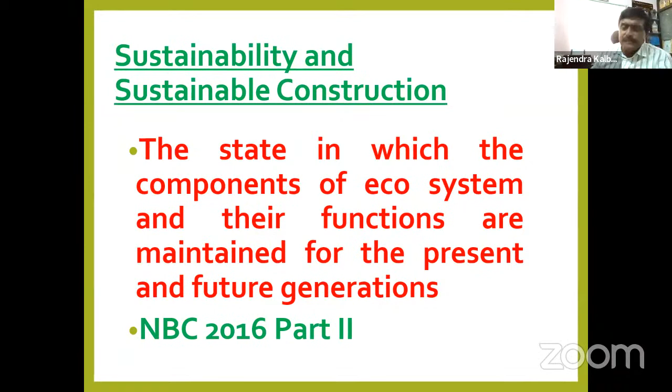Well, the theory is all right, let's see how practical it is. One man and water starts way back in the age-old Adam and Eve period, or in the Stone Age, where man had not seen his own face. The first time his relation with water started was when he saw his reflection, then he started drinking it, then he started living with it.

So it's all history - man used to go near the water, get water, and live near the water surface, the water area. And that is why we have civilizations named after rivers - it might be the Indus, it might be the Nile, it might be anything in the world. It is all named after the river just because people lived near the river belt.

Moreover, people used to carry water themselves and they knew the value of water. Of late, what happened - science started coming in. As science came in, people started living away from water. Cities started developing. People are not bothered whether we're living with water or away from it, because we have all the facilities now - we have the pipe system, we have the pump system. Even if you are hundreds of kilometers away, you can get water from a water source. You don't know where the water is coming from, but you have a water source in your house.

So, yes, you're going away from nature. You're going away from the ecosystem. You're going away from the basic system, what is called the environment.

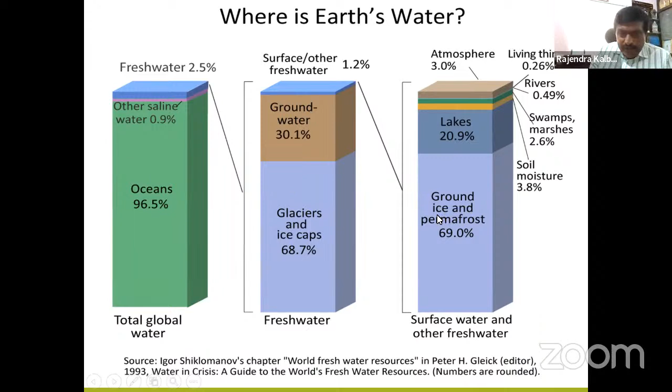But how we can? This is very interesting. On a daily basis, how much water do you need? If I had asked you this live, you would have answered.

Anybody who knows can put it in the chat. How much water does a person need for day-to-day life? I have given the percentage and the government target here. Exactly what number of liters per person per day is needed to satisfy day-to-day needs, including washing, drinking, everything. So 150 liters? It is 135 liters written there. Very nice, it is not 135. The government target is to supply 130 liters per day per person in urban areas, 100 liters in semi-urban areas, 80 liters per person per day in rural areas. Even with 80 liters people can survive. So is 80 liters the quantity of water required per person per day?

I'll tell you, it's very interesting, research has been done. They found that though the government gives 130 liters per person per day in urban areas, in cities like Bangalore, Mysuru, and everywhere they target to give, what people actually use is around 250 to 350 liters per person per day. We use that much water for car washing, ground washing, unnecessary gardening, house cleaning, which was not required. For car washing, you don't have to use a spray. There are better methods than using a pump to spray, which wastes a lot of water. Totally, people use around 250 to 350 liters per person per day.

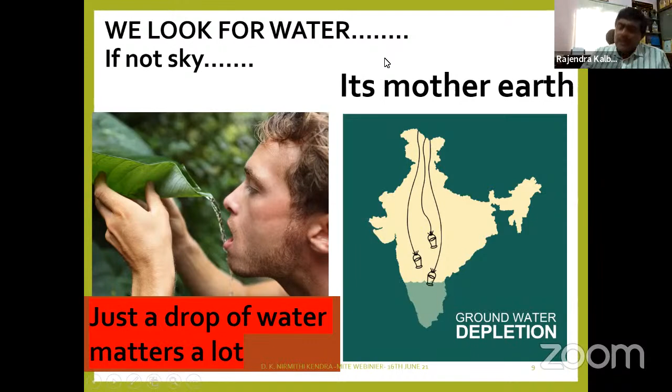Here is the answer, I'll tell you. History has taught us to be near the water, but science has taken that away - we have taken the water to our doorstep. We have enough pipelines, we have enough infrastructure. Even if it is deep in the ground, we can take the pipeline and bring the water out.

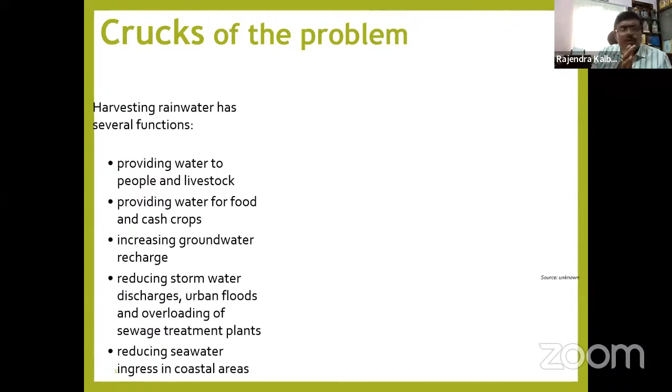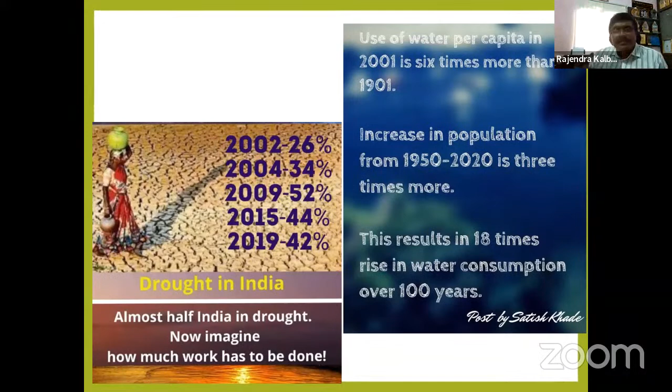So why are drought conditions increasing in the country? There's a study - in 2002 it was only 26%, in 2019 it is almost 50%. Even otherwise, almost 50% of India is facing drought conditions. Of course there is population increase from 1950 to 2020, that is also a reason. But is that the only reason? Are we not educating people properly even as the population increases, so they can live in this world happily? We need to ask questions of ourselves.

In earlier days we used to see water everywhere. There was enough water for everybody, and wells were a wonderful source of water. During the earlier kings' time, even the British period, it was only the open well and lakes as the source of water for human beings. Slowly, around 60 to 80 years back, we started drilling borewells. Once the borewell started and pipelines came home, we started seeing water only in the pipe. Then slowly, nowadays in cities, people see water only in plastic bottles - common in Bengaluru, Bombay, Chennai. I have seen people living only on plastic bottle water. I don't know what will happen. The same thing keeps happening - please read on, I don't have to tell you anything more.

So what is the solution? What's happening to water? Water has become invisible - it's becoming 'gayab', disappearing. I don't know where it will go. Now it's time to make it visible. So let's get into the real business of making the invisible visible.

What are the reasons for this invisibility? Depleted quality, scarcity, excessive use, depletion of groundwater level, drought, wastage, water pollution. These are human-made reasons - depleted quality is because of excessive usage, scarcity is because we are not saving it, excessive use because we are not taking care, groundwater has depleted because of borewell pumps, drought has come because we are not keeping Mother Earth soft and clean. We are wasting water, polluting water - it's all in our own hands. Yet we blame nature, we blame the public, we blame others, saying water is not there or its quality has gone bad. To make it visible again, there are solutions, though many of us are not following them.

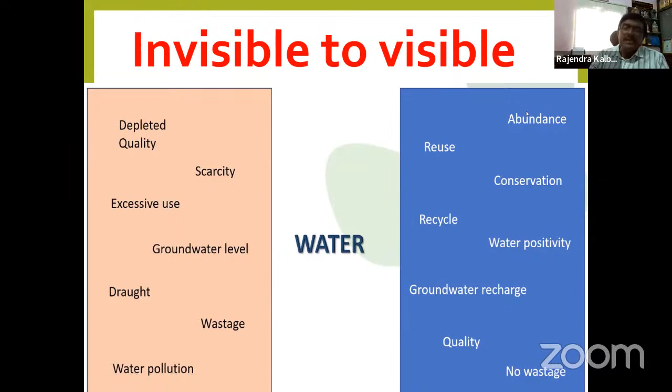Some are doing it, but now it has become a big business in India and all over the world. So friends, what is harvesting? Whenever we talk about water saving, people only think of water harvesting. Let me finish that subject. It is beyond water harvesting - there's a lot more beyond harvesting. But anyway, collection of water is harvesting.

When water falls on your roof, you collect it, filter it. Either you keep it in your sump tank, or charge your borewell or open well. If you don't have either, put it in a pit in the ground and allow the water to go into the groundwater table. Borewell recharge can be done directly or indirectly. For groundwater recharge, there are different methods - percolation pit is the best, including short, long, and deep percolation pits. Saving water bodies without polluting them is very important, as is watershed development - if you cut a tree for development, develop another watershed area so water is there in that area. Finally, it is the efficient and proper usage of water - when you have a lot of water, like when you have a lot of money, you spend it freely, right?

Yes, you do it, but you don't spend all the money. We have a lot of water now, but just because we can, does that mean we can spend everything? No, we need to take care of it. We need to do it in a very efficient manner. Water and money go together. Then only you can save water.

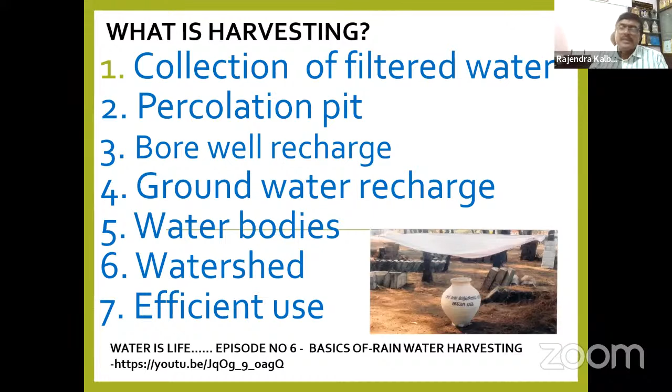If you go through episode number 6, basics of rainwater harvesting, in the Water is Life channel, you will get details on the different methods of rainwater harvesting. Who has to do it, what you have to do, where, when, with what - this is a common question. People ask, sir, how to do rainwater harvesting? I'll show you this video. It's very simple.

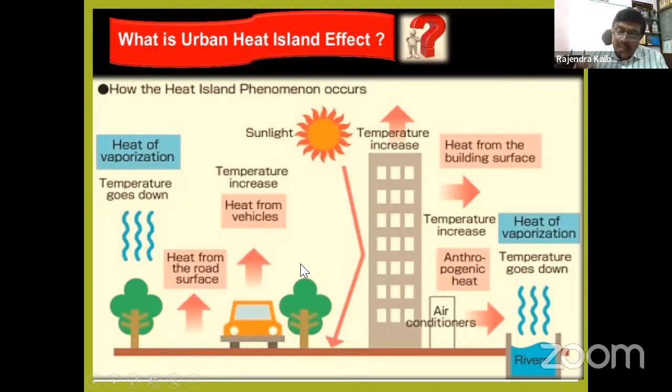You can make out very clearly that all our construction gives off heat - it might be heat from the surface of the road, from vehicles, from the floor, from temperature increases from buildings, and from air conditioners. It's only the trees and the rivers that give you cool air. So we need to sustain this along with the growing urban city environment.

Water scarcity in India - I don't have to highlight much on this because you've read everything in the newspapers. This is common nowadays. Every summer there's an article saying water is scarce, we are going to get into problems. Everybody has given a target of 5 years, by 2025, 2027. Many cities, especially Chennai and Bangalore, are going to dry up. If you don't take care, you're going to face problems. But still, Chennai is somehow managing now because they've done a lot of water harvesting and taken measures to increase the groundwater table, so that things will go on.

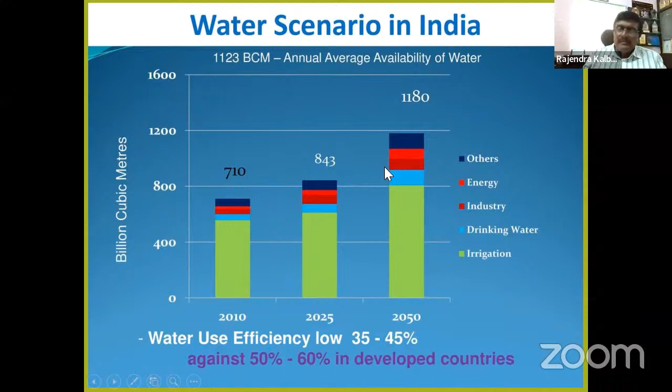How much water do we get and where does it go? We have houses of say 1,000 square meters, or 100 square meters. We are living in houses of minimum 100 square meters. So for 1 square meter with 1 mm of water, just 1 mm of water will give you 1 liter.

Suppose India's average rainfall is 1,200 millimeters. Forget about it, we'll take Bombay or Bangalore only, say 900 to 1,000 millimeters of average rainfall per year. So 1 square meter into 1,000 mm is equal to 1,000 liters. Very simple, 1 square meter will get you 1,000 liters.

If you are 10 square meters, then for 100 square meters you will get that. Because here we call it all square feet in Mangalore, so it is only a 1,000 square feet house or 2,000 square feet house. Like in Bangalore, they call it 10 square house, 100 square house, so that's why I'm getting confused.

Don't worry. So a 1,000 square feet house, or 100 square meters, at 1,000 millimeters will give you 1 lakh liters. If you can collect 1 lakh liters, there's nothing like that. Forget about the cost of the tank, I'm not talking about that, but you get that much amount of water free of cost - that is what is important. In 1 acre, we have 10 lakh liters.

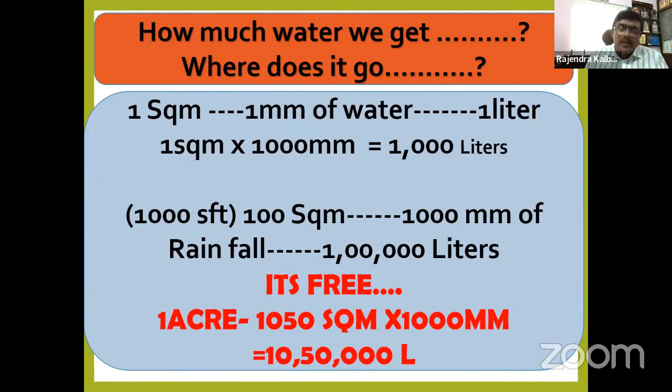Well, it's interesting. Now okay, we get that much water, but how are we using it, how can we get benefit for our purpose. Suppose there are 4 members in a house, we just calculate in a simple way. 4 members need, say, 100 liters per day - I said 80, but 100 liters per day. If you calculate over 365 days, you need 1,46,000 liters.

And still, I feel we are much near the average annual requirement of hygienic needs for a human being as per World Health Organization. What is the minimum quantity of water needed for a man to satisfy basic needs? Here it is: at a higher quantity, about 20 liters per capita per day should be assured to take care of the basic hygiene needs and basic food hygiene.

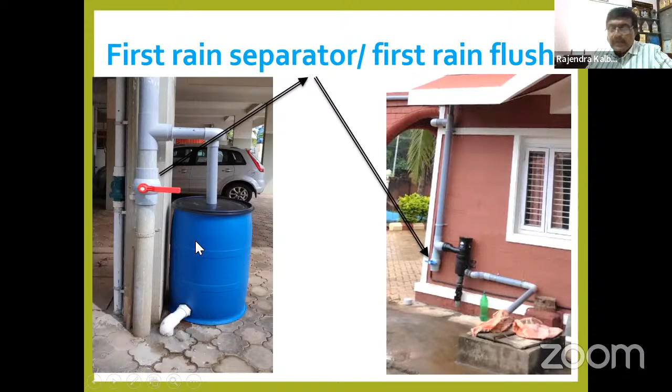So you should never forget a first rain separator. This is how it works when it's heavy raining in a multi-story building, we did it for the multi-story building. See the amount of water - that's only a first rain separator. Whatever collected in that will go and it all separates out.

Now the heavy rain is happening, you can see the water in the drain. When the heavy rain happens, we just opened it. So see whether any dust particles collected in the first rain separator. If there's no dust particles, then absolutely no problem, you can allow the water to go into your bore well or the sump tank.

See here, this first rain separator is with a knob, very clearly. You close it, it will go through the filter, then from the filter, it goes into the well. Very, very simple.

I've got a video, number 7, which explains very clearly about the first rain separator.

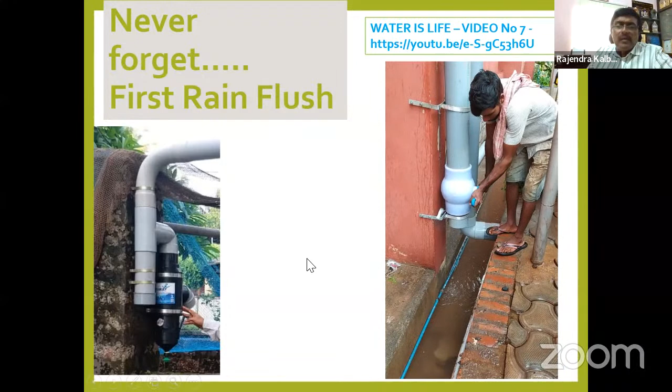Okay, now what are the types of filters? There are different types of filters, my dear friends, all available in the market. But the only problem I have seen with the public is that they just collect the filter, install it - the plumber will do the installation and he will go. Finally, people don't know how to maintain the filter.

There is everything like our human body - there is a small piece of maintenance every filter has. Some filters you don't have to maintain immediately, but at least once a year you need to maintain them. Some filters need to be maintained regularly, keep an eye on that, see that the sludge is not collected too much so it doesn't block the way of the water, and so on and so forth. There are simple filters like pop-up filters made by KSCST. It is very simple, but you need to maintain it, clean it once a year.

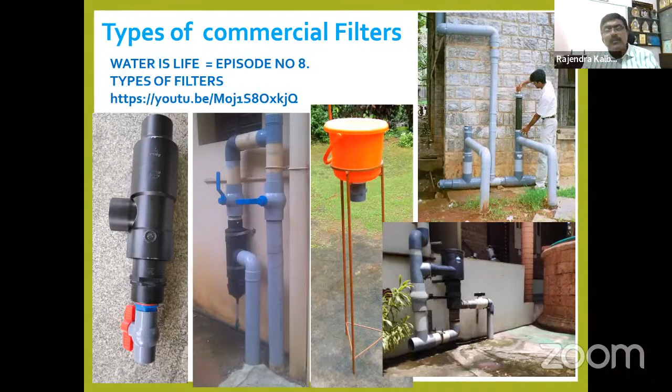And at the base, you can see this is my house. This is episode number 8. We'll tell you what are the types of filters and what the filters do, how you can prepare your own filter. This filter you can prepare yourself, it's very easy.

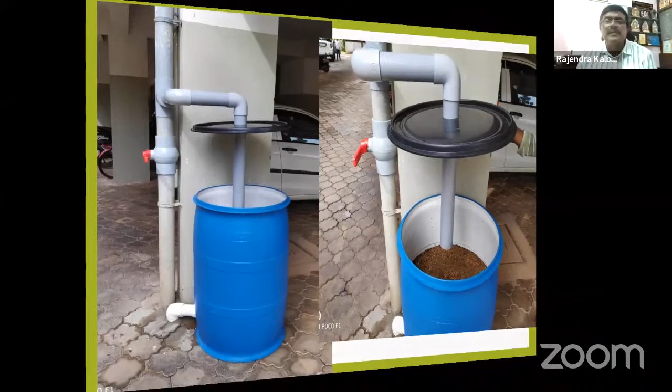With different varieties of boulders, you put it, and finally Netlon mesh, then coal, then Netlon mesh, and leave a small space open for the headroom for the water to collect there. And you got pure water, you can let it into your borewell.

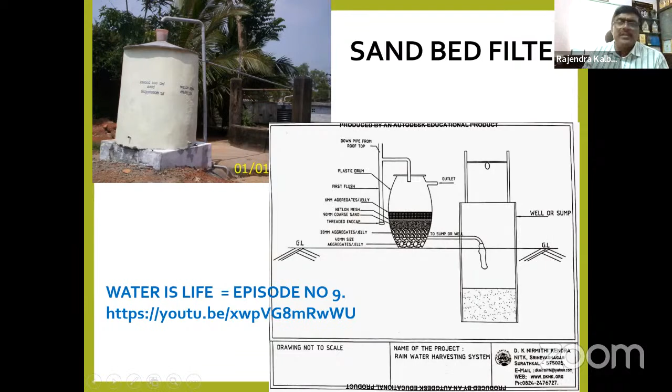Episode number 9, I said you can get a very clear idea on how to make a drum filter by yourself. You can make it yourself, nothing complicated. This is very simple. This is my house, my dear friend.

I have done rainwater harvesting for the past almost 22 years now, from 2000 I have been doing it - 2001 and 2002, almost 20 years down the line. And absolutely no problem - I am drinking well water without boiling, without filtering. Well, let's get into other aspects.

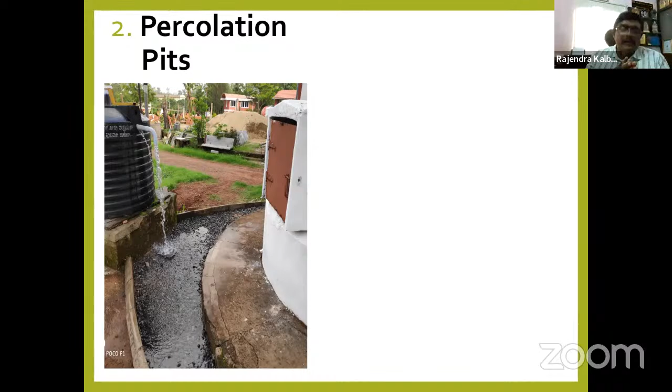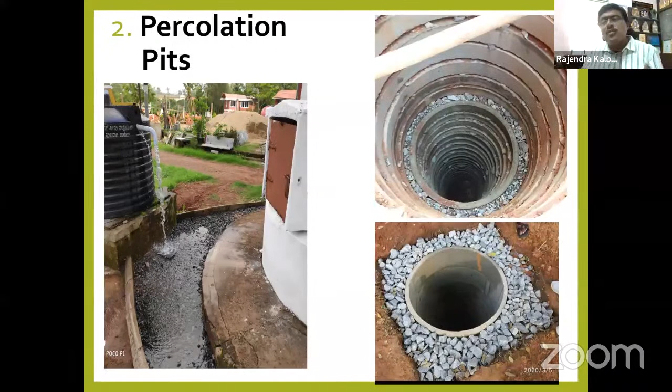And if water is too much, then you make a deeper hole. When you have the capacity to make a bore well of 300, 600, 1,000 feet below, make a percolation pit of 30 feet - who stops you? And you can allow the water to go in. Here's a simple method which you can do during construction. This is a small building, but see.

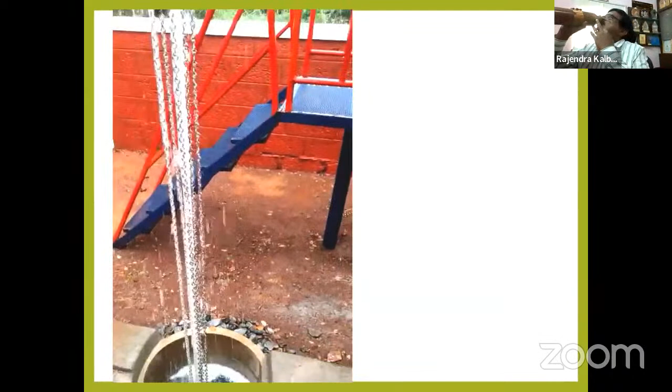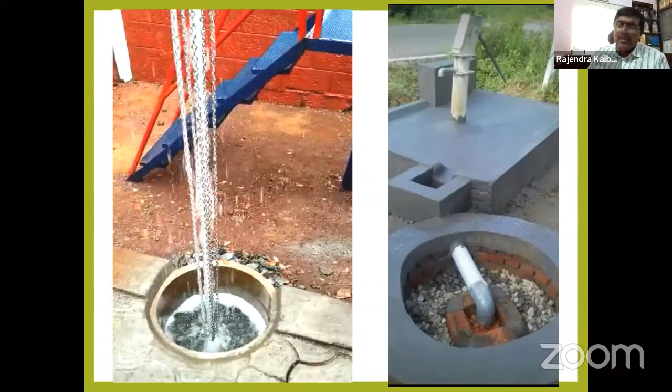See that percolation pit, it absorbs water, it never overflows. This is what we can do at a construction site also. Our laborers wash their hands, our laborers take a bath, and we allow the water to go and it will spoil the surface of our construction site, and a lot of mosquitoes will come around. Instead of that, just allow it to go into the percolation pit. If you are in a house, you can do a similar type of percolation pit, absolutely no problem, and later cover it.

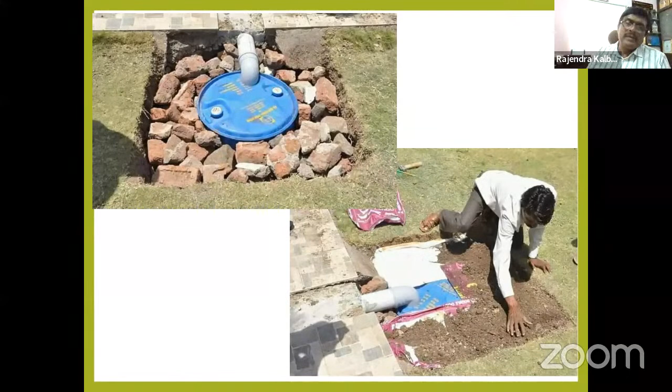You can use the surface, it might be a lawn, whatever it is. This is my house again, and we have done a percolation pit at the exit - this is the main gate. Next, I've made a diversion, I've made a percolation pit. See, this is not a ring, and I kept a hole there, and I covered the top. I'm using the top surface.

And this is the cushion area where I've filled it with all the waste, jelly, gilly, and stones and all.

You're not losing your garden space. You can cover this drain also, so that the entire space is available for you. Water goes through the drain, enters into the pit, stays there, and gets absorbed into the ground. Very simple, and this is at the back side.

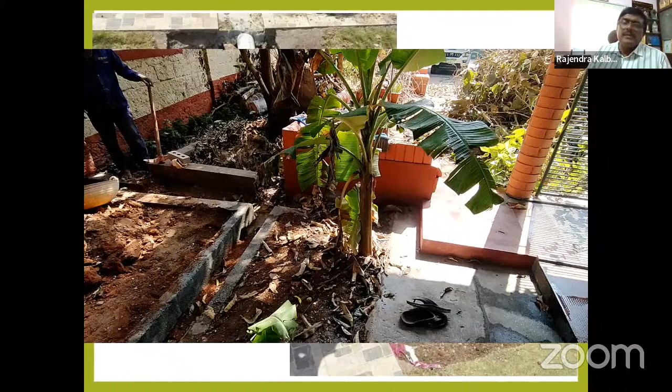This is done during construction only. It need not be always round, it can be square also, it can be rectangle also. An old leach pit was available. I made it a little bit shorter, created a buffer zone, and did a percolation pit. Very important, at the base you need to put boulders like this so that silt does not form and block water entering into the ground. So simple, it can take lakhs and lakhs of water.

Okay, I will go further. And if you have a very big building...

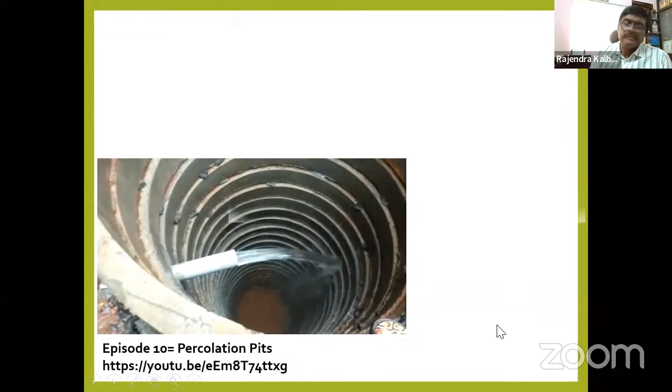This is another percolation pit which we have covered. See what we have done at the site, you can see the water getting into the percolation pit. With a huge building, that building can give you an annual 50 lakh liters of water. It is a huge quantity of water. I have made it go into two percolation pits. This is one at the bottom, this is the second percolation pit. Just have a look at it.

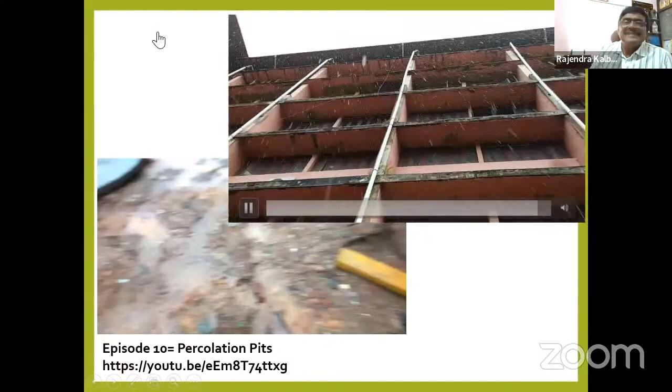These types of percolation pits can take a lot of water, especially at a construction site. Can't we do that? And yet we struggle for water. Why should we struggle for water?

And this is a wonderful machine, the borewell. This is interesting. See the quantity of water coming out. And with that much quantity of water, we take it from the ground and we are never bothered to give water back into the ground.

And there we go wrong. See, if you look at the earth structure, earth behaves like a sponge. We thought there is a huge lake below the ground where we can take more, sufficient quantity of water to meet all our greed. No, it doesn't work like that. It's just like a sponge, and you are digging a hole in the sponge and squeezing the water out.

In a given rainy season, water can enter up to a depth of say 60 to 100 feet only. Beyond that it cannot go down. Then it takes its own sweet time to go deep into the borewell, it takes years and years together. And we insert a pump and take it all out within say 10-15 minutes.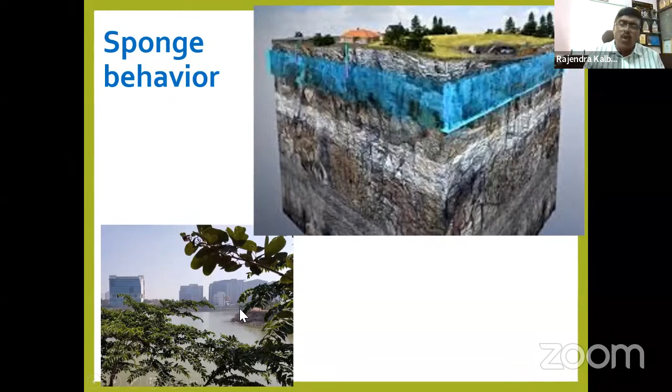So the water which falls on the ground can go up to say 50 to 100 feet in a given rainy season in one year, and then you can extract it, take it out in a year. Once the water table goes down, rain has to come again, then you refill it, you do water harvesting, and you can use it again. That's a wonderful cycle. Depending on the condition of the ground surface, water stays, and that is why lakes are formed.

Now, the effect of a borewell is very, very bad. People say it's easy to think about a borewell, but if all were open wells, everybody would get water. In a given layout, if one man does a borewell with a high pressure pump, a cone of depression will start, and even the open well will go dry. That is why heavy pumping is very, very dangerous for groundwater.

How do we recharge a borewell? It's very simple. See, this is the borewell which has been dug. Tighten the base, then you drill. Small drills are to be done, and drill many holes have to be made.

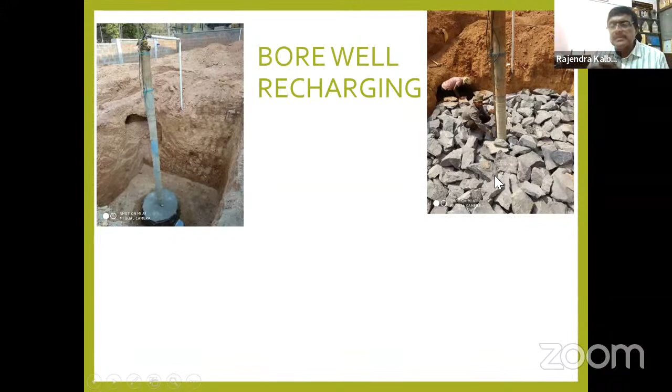Cover it with netlon mesh. Then bigger size stones, then smaller size stones, then a netlon mesh, then coal-like material, around 4 to 6 inches thick, you have to put. Then again a layer of netlon mesh, then cover it, and make a stand platform and allow the water to go into the borewell.

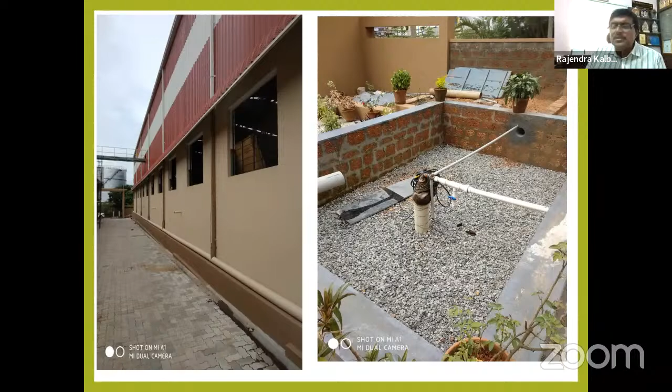You will be surprised to see the amount of water getting into the borewell, deep into the ground, into the deep aquifer. It's so superb, it's awesome. See the quantity of water getting in. It slowly drips into the ground, absolutely directly deep into the mother's stomach.

Absolutely no problem. If you start feeding your groundwater, then you have the right to take water also. You don't feed, you only want to take - that's not right. Like in a bank account, if you only put money in, you can take it out. Without putting money into the bank, you cannot take money out. So you need to recharge. That's the basic thing - recharge your mobile, recharge your bank account, and why not recharge your ground?

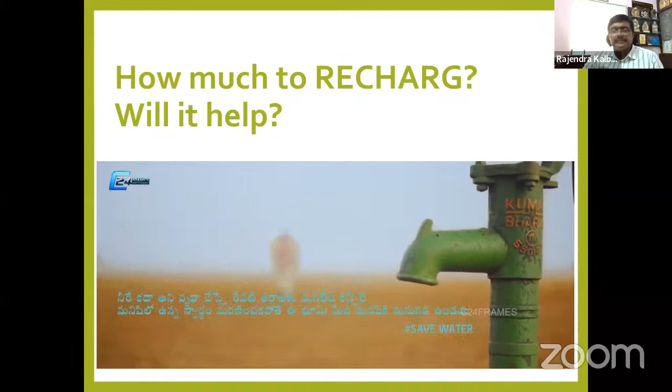So it's very simple. It says humanity cannot survive if greed does not die. The water has to be shared among everybody. We cannot be very greedy. We engineers have to think 100 times about it, especially in our construction.

Coming to the point, yesterday we had a lot of discussions on the IGBC ratings and Indian Green Building Council. I don't know whether you had a discussion on these points, what IGBC was telling. Have you noted that the water conservation points and energy efficient points - they have other points also, they have a big list. Out of that, what rate gets the highest ratings, the highest points? Have you ever observed? If you had observed, you would have realized something.

It would have been really nice - if you had observed, there's one more interesting thing. Thank you for your feedback, my dear friends. See, the IGBC ratings clearly tell you that water conservation stands the highest among all the IGBC rating points.

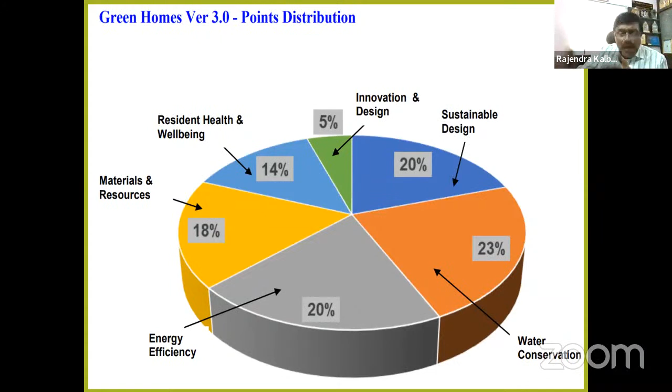Total water usage in construction is something like that. Water used per unit area of construction largely remains undocumented. It's not that it's undocumented - we are just not bothered. Any engineering company, any engineering college, any university, if they build a building, nobody is measuring the quantity of water being used for the construction of that building. So that is the state of affairs here, but there are some studies, very nominal studies, that have been done.

They say we need around 27,000 liters per square meter of building construction. The whole building is around 1 lakh square meters. Imagine the quantity of water required.

So actual construction, as per calculation, if you can make as per your adequacy requirement, as per your calculations we have, we know we calculate adequacy - what is the cement, steel required for the building, and the same way we can calculate what is the water quantity required.

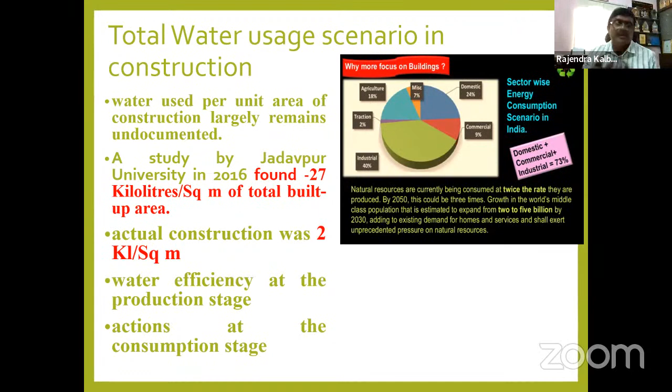We need to have water efficiency. It has to be in the production stage, construction stage, as well as usage stage - the total cycle of the building. You need to calculate the water usage for it to become important. Actions at the production stage, consumption stage, and usage stage - all their efficiency has to be there. But they say 20 kiloliters, that is 20,000 liters, is required for a building. That is what they say.

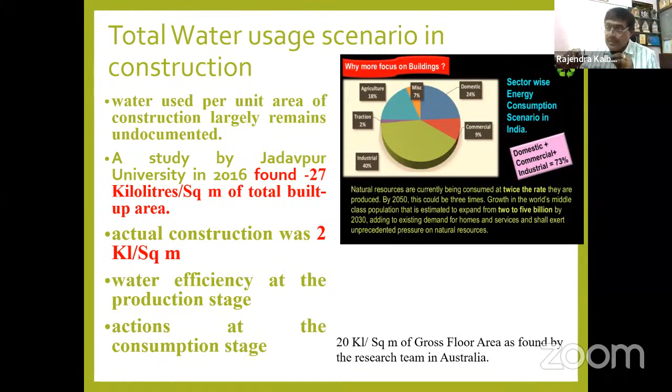Practically, this happens. Designing as a whole unit, concerned as a stakeholder, what we need to do - our design has to be 360-degree beautiful, 360-degree correct. And we should not harm the eco-sensitive sites.

Suppose we have a building that has to be built on a hillock. Just because we are doing a building, you break up the hillock, level it, and then do a building - then probably the earth behind the hillock, what you have leveled, might fall off or cave in any time. So you need to build a big retaining wall. You spend a lot, and finally even that retaining wall might slide down one day.

We don't know, so you need to be very careful. Lakes, forests, canals, etc. have to be taken care of. Wildlife corridors, wetlands, floodlands have to be avoided. IGBC guidelines have to be taken care of. Then you will be designing your buildings in line with the ecosystem.

So whenever you build a plant, when the construction is going on, if possible, you grow the greenery also together. And you make the proper total provision for the greenery also.

Any plant utilizes 2% of the water you're putting into it - only 2% of water is utilized for making food. Or if it is giving a fruit, it is only 2% of the water used for making the mangoes, what you eat.

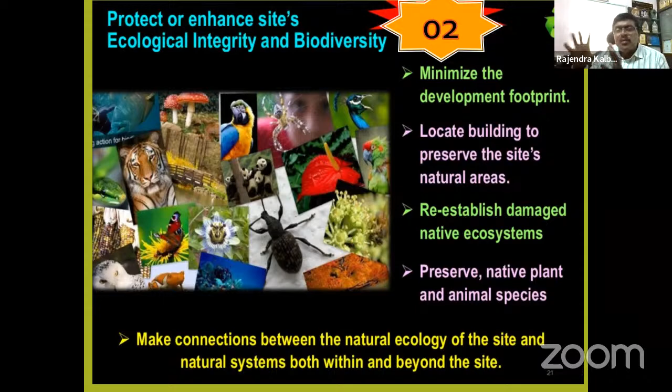Look at the building, preserve the site, natural areas - we cannot go on doing it. So sensitive construction as well as sensitive usage of water, everything comes together. And if you don't do that, this is the problem - earth will act according to its will and wish.

So let's be very careful when we do our buildings in future. Coming to civil engineering now, designing the material - what are the types of material we use? What type of material gives less water usage? What are these sustainable constructions? Let's see.

When you design a building, if water has to be used less in construction, then it should contain a lot of open space, fewer walls, and the wall length has to be little, with free movement of space. People are comfortable - once going into the room or house, they should not feel very hot.

And they should not feel uncomfortable so that they drink more water, use more water - no use. When they drink more water, no use, man will only go to the washrooms regularly, nothing else. So let not that happen.

Your designing has to be very space efficient, and you should use only locally available materials, because the temperature and environment conditions vary depending on the place. For example, in Mangalore it's a very hot and humid place, and if you bring material all the way from Rajasthan and put it,

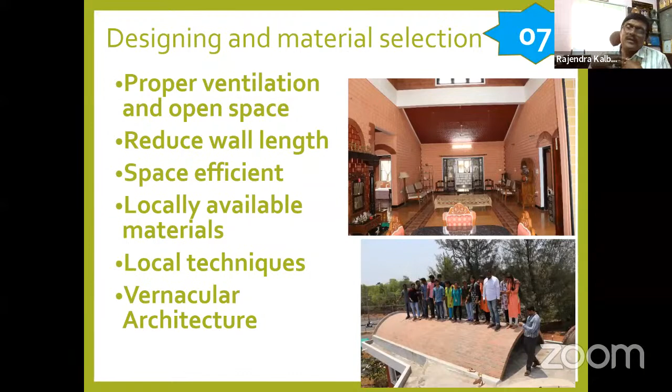This is a mud block building. You can see arches there, and exposed masonry. You can see filler slab, where you have less quantity of steel and cement, so it will not give you more heat, and you feel comfortable inside using less quantity. So the circle is complete.

What are the different eco-friendly construction techniques? Apart from using locally available materials, you need to avoid too much steel and cement, which will give you more heat. Now, what are the techniques? If we start from the ground, we have arch foundation.

Of course, you're all from civil engineering, all from the Nirmithi concept, so we have come across this arch foundation. Instead of using lintels, too much lintel means too much steel and cement. Avoid lintels and beams, use arches. In earlier days, they built bridges using arches. When they carry so much load, can't our arches carry a simple slab load? It can. We just need to do it properly.

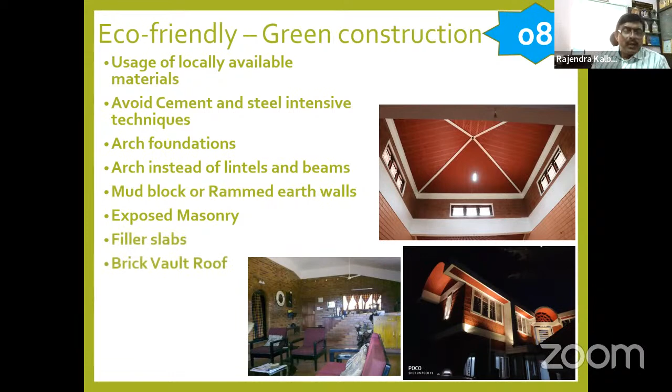Mud block, rammed earth walls are one of the best options. They give very comfortable interiors, less cement and water, and exposed masonry, filler slab, brick vault - these are all familiar to you, I don't have to explain.

People always say that when we do a normal construction in stones and similar materials, at least 1 square meter of wall construction needs an average of 350 liters of water for 1 square meter.

What if we don't use water at all? If this is adhesive, then you don't have to use water. This becomes zero - it will become very, very water efficient. Absolutely no problem. And people say there's a lot of wastage.

Now machines are available which will provide a paste of chemical only on the edges, only on the surface available, whether it's hollow or not. So you have a lot of efficiency there. You'll save a lot of materials with these types of clay blocks.

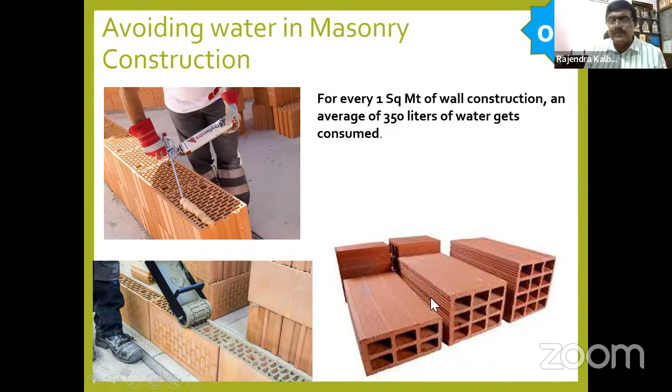We can construct almost with very, very minimum cement joints. There are concrete blocks which again consume less, and we have what is called interlocking blocks, which again hardly consume any cement mortar - absolutely no mortar required.

And I have constructed this - this is my own construction. I don't preach what I don't know. See, these type of mud blocks we have used, and this is not cement mortar, it is cement slurry. You can see there is absolutely no mortar anywhere - it is just blocks laid one above the other, interlocking mud blocks.

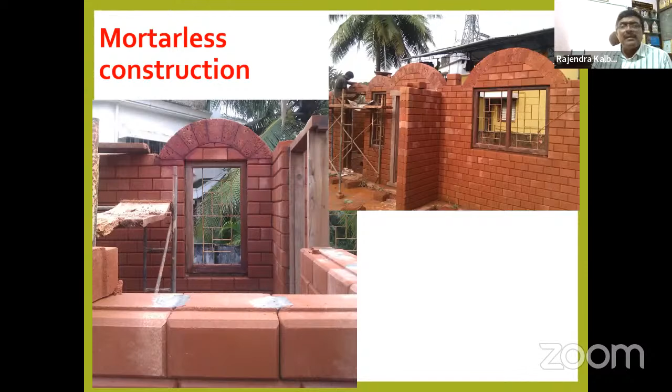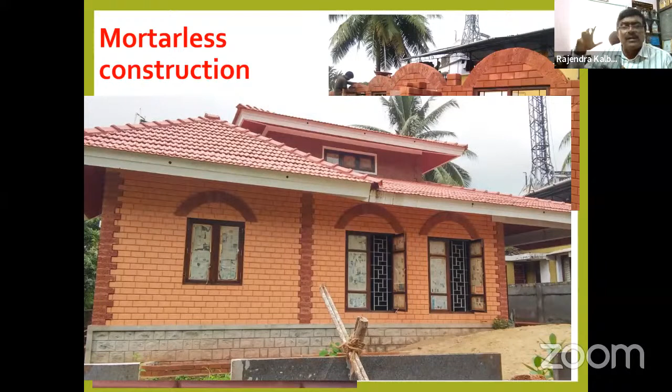And the house can be completed very nicely. It looks very beautiful - see this. The people are very happy with that. This is mortarless construction, absolutely no mortar. We only use cement concrete for the slabs, roofs, and a little bit of arches.

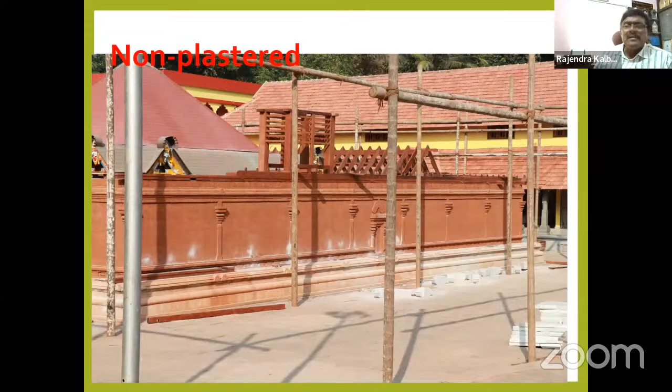With all these techniques, absolutely no plastering. This might be a temple or a house - no plastering at all. It gives you dual advantage: one, saving cement; other, saving heat, less heat and more comfort, and less usage of water.

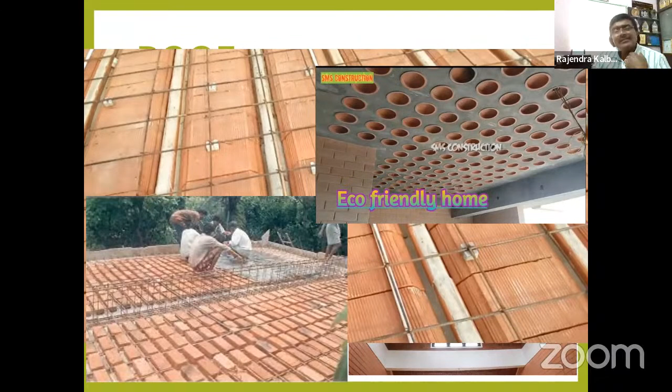Even the department hasn't bothered to plaster it because they're happy with the exterior. Nirmithi engineers use filler slab with less cement and steel, so usage of water also comes down and the interiors look good. This is the filler slab with clay or Mangalore tiles, hollow clay blocks, bricks, pots, bottles, and coconut shells. We can construct filler slabs with different materials.

Absolutely no problem, but this is one concept we are only promoting - that is zero maintenance building. No plaster, no paint, no maintenance, and we are very happy in the long run. Sustainable water usage will come in the long run - absolutely no water required.

These are all old buildings. This one is around 30 years old now, this one is around 20 years old. Even today it looks the same - absolutely no painting required. It is called the natural beauty of the building being maintained.

Now coming to the buildings, how we can save water in the finishing. There are a lot of fittings available, especially in IGBC, water saving fittings that carry special marks and points. You have to use waterless urinals, it's very good. Otherwise, very water efficient closets are available with a maximum of 6 liters, instead of 12 to 18 liters used in the olden days. Now you can get a water closet with a maximum of 6 liters per flush.

You can use a mini flush option too, where hardly 1 or 2 liters go. Then there's a dual pipeline for flushing - this is a different concept. In Nirmithi it's not possible, but in public buildings it's possible.

When you have an STP or a leach pit sort of thing, a septic tank, the water that comes out is clear water, and this clear water is allowed to go into a separate tank that is used for flushing. This is possible. Then there's the push button, dual button flush knob, and all these things are available. There are many efficient fittings available nowadays.

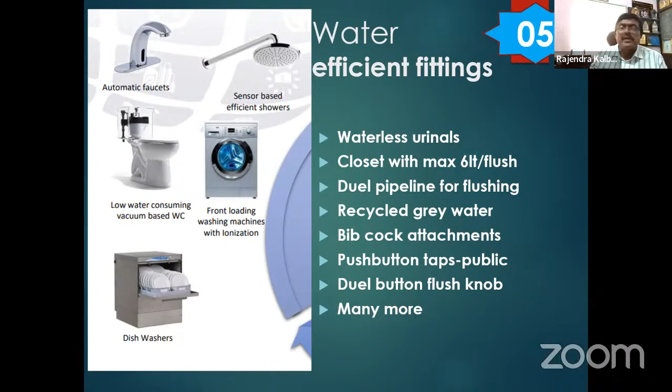There's something called aerators, I'll show you that - this is very efficient. Earlier we used to get water fittings like this. All your houses, offices, public places should put these aerators. If not, these fittings are available. Please use this so you can save water and live comfortably.

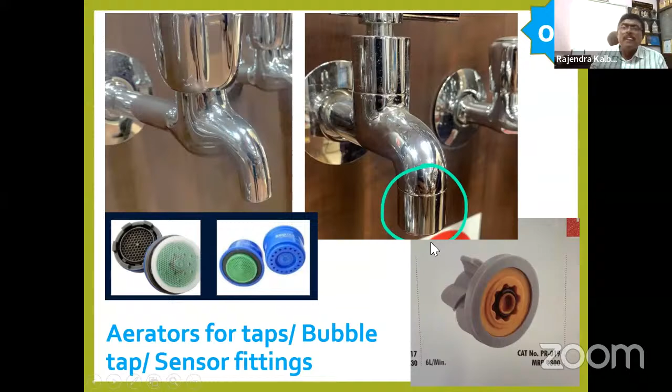This is one more technique we are using - this is again in my office. We have used a biodigester, the first to use this in the district, which gives you very clear water with 100% recycling. Your toilet water is completely recycled and you get clear water used for gardening. It's a very eco-friendly solution - no power required, power consumption is zero, lifetime zero maintenance, and less space required.

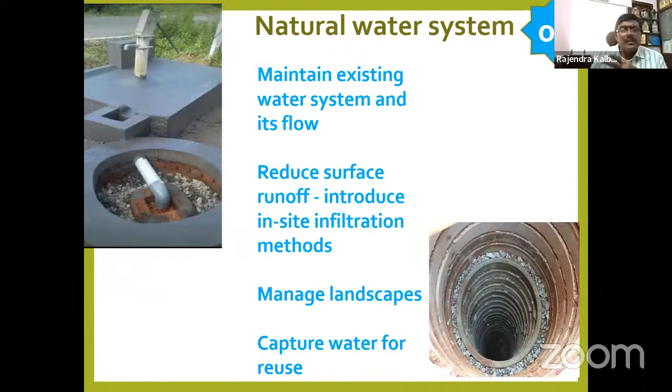And it gives clear water output, which can help greenery develop very easily. The existing septic tank can be converted and the water is 100% recycled. So at construction sites, the best thing is to do a percolation pit, maintain the existing water system flow and runoff, and do a big percolation pit so water is not wasted. Don't allow water from your site to go outside, so whatever water you draw from your borewell is used for your own purpose.

So we have one more fitting available, again in our office - we have something called water from nowhere. That is, we get water from air, an air to water machine. This machine converts humidity into water, so no plumbing is required - just plug in, collect water, and drink it. Very efficient and very helpful.

Then there are bottle filters available now in the market. AquaGuard is one. Then Neeru filters is another, available for Bangalore - it's not available here, I'm looking forward to that. If all the laborers in the construction sites can use this, they can straight away take the tap water, fill it, and drink it.

And it filters and gives you a healthy body. Your body will remain healthy, and they can work for a better digestive system. Everything will work happily, absolutely no problem.

So all you need to become sustainable in construction is to become water smart. Apart from using water efficiently, you need to become water smart in every aspect of your life.

So I was talking about water metering. This is a classic example of a village in Maharashtra, where they practice water budgeting every year. They calculate the water requirement for every farm and the average rainfall in a year, and maintain something called a Paani ka passbook. Once they develop that passbook, according to their calculation, if they have a borewell or a lake, they pump water to each field according to what crop he wants to grow. That's an amazing technique, and it has been well appreciated all over the country.

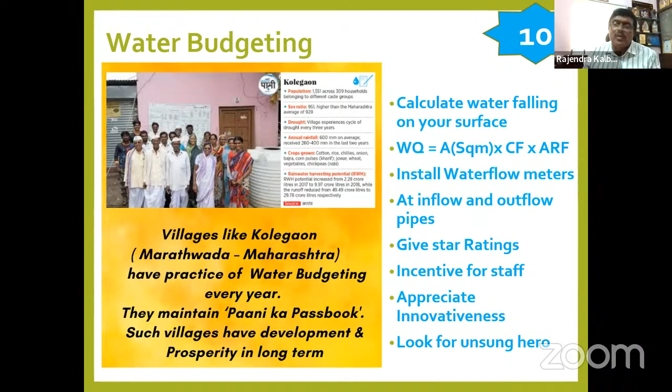Then you correlate it: number of people, number of houses, total say 1,000 liters here, 20,000 liters there, divided by the total number of people in the house. Per day, you will come to know how much water you use. This is called water budgeting.

So water is like hard cash. As I told you, unless you recharge it, whether it's an open well, a lake, or a borewell, it is like hard cash you cannot withdraw — an ATM card will never work. So it is like an SB account. Surface water is like cash, the SB account is like an ATM card, and the borewell is like an FD account.

So you should use your borewell only when your SB account gets dried up. You don't have money to put into the SB account, it's empty, then you remove the FD, otherwise you don't. Nowadays, people are not bothered whether it's SB or FD because the bank has a sweep system — your FD automatically gets into the SB, and finally you don't know how much you're withdrawing. You think your FD is still there, but it's drying up very fast. That's very dangerous, and that's what's happening. We are not bothered about our SB account, we are just taking water from our FD account. So let's be careful.

So if we really work hard and bring conservation into the system — take up lake construction, lake rejuvenation works — we need to be very careful about how we save the environment through lake rejuvenation. Once we do it, even a 20-year dried up Devanahalli lake can come back to life. Even a 10-year-old dried up open well can come back to life just because we've taken up rainwater harvesting methods, recharging the groundwater. Water can be everywhere very soon.

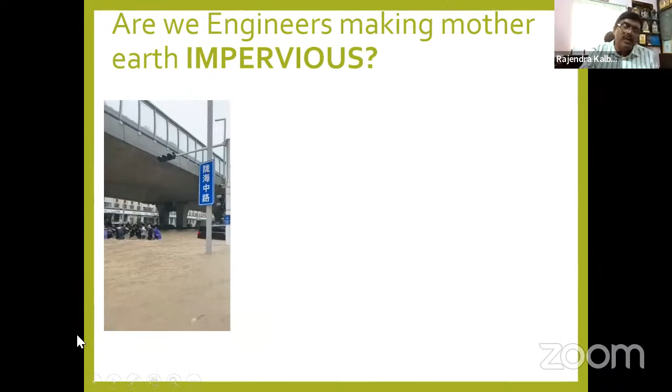But now what have we done? We have built roads, water does not enter. Our yards are covered with interlocks, water does not enter. So water has no place to go into the ground. Instead, now we are allowing water onto the road. And when you allow water onto the road, this is what happens.

There will be loss of human life. There is a lot of water flooding. This is called urban flooding. Nowadays it is common in Bengaluru, common in Bombay, common in Delhi also.

Can't we reduce this? Can we engineers contribute ourselves by providing percolation pits in our own ground? Prime Minister has given a call called Catch the Rain when it falls, where it falls. It's a wonderful campaign our Pradhan Mantri Modi ji has taken forward. This is the second year which is running. The first year, the Catch the Rain campaign went on very well, and a lot of MGNREGA programs also took place in the rural side. A lot of people worked only on water conservation, clearing the weeds, clearing the ground, and doing water harvesting. Lake rejuvenation has happened. Borewells and lakes have been cleared up. Open wells were cleaned up. So what can we engineers do now?

This is my previous episode of Catch the Rain. From the Catch the Rain campaign itself, I have done 3 videos. The third video will help you reduce runoff water. Just go through this. I have 19 videos in total. I cannot show you everything here, so I'm showing you one video. Just go through it.

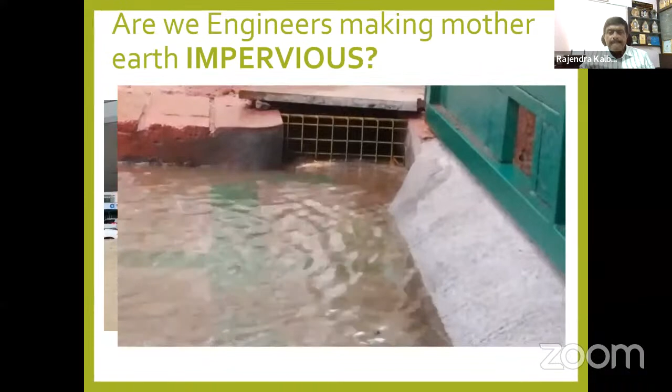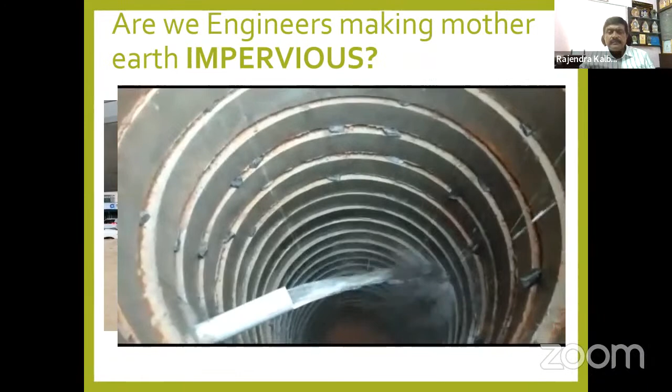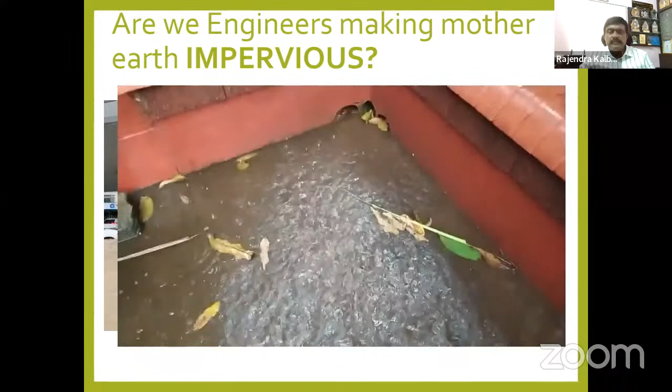Rainwater falling on every compound flows out into the streets. There might be more than one outlet for water to flow out of the compound. Construct a recharge well or a percolation pit near each outlet. Divert the outward flowing water into these recharge wells. Water collected in these pits will slowly seep into the ground, thus recharging the groundwater table. Construction of a recharge pit or percolation tank is explained in detail in episode number 9 of this channel. The depth and size of the percolation tank can be varied depending on the quantity of water and the nature of the soil. Water from only paved surfaces, concrete roads and yards should be let into these pits. Do not let water from natural muddy ground into these percolation tanks, as it leads to collection of silt and soil causing blockage. In muddy grounds, farms, estates and hilly areas, percolation pits can be simple and shallow in depth. They can be square or rectangular in shape depending on the soil condition.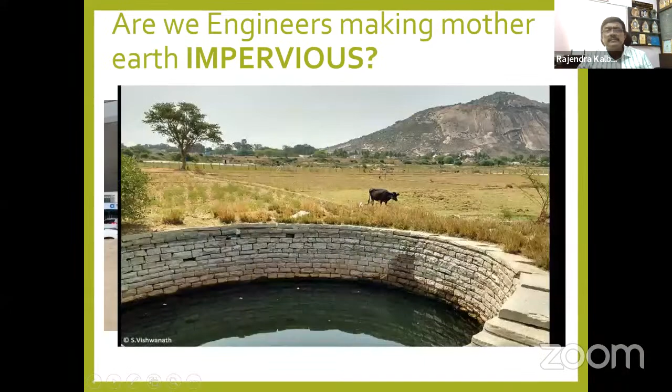Every compound should stop rainwater flowing out into the streets. Then urban flooding can be controlled to a large extent. Let us make up our mind and follow these systems as explained in this series, Catch the Rain Part 1, 2 and 3. Once done, it is a lifetime investment to recharge the groundwater table and contribute to nature's well-being. Let us join hands and give back to nature what it wants. That's all in this episode, Catch the Rain Part 3. Press the subscribe button, post your comments and share this video with your family and friends. Namaskar.

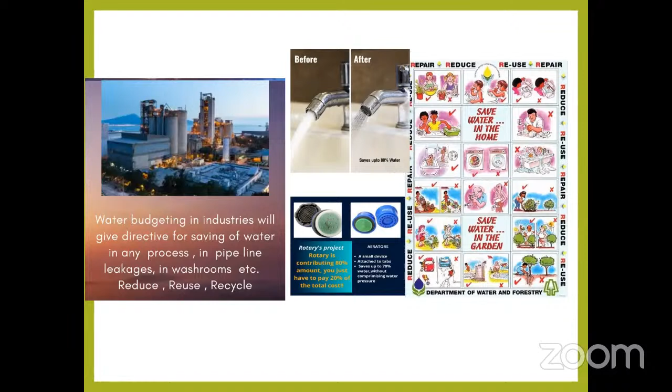So friends, that is how we can also contribute by not allowing runoff water into the cities. A large extent of water can be controlled, not 100%, but to a large extent, if every house site or multi-story building does a percolation pit. Of course, we have our own restrictions. Just because I'm telling you percolation pit, you cannot do a percolation pit in every place. I have done the next video, which is do's and don'ts, explaining where the percolation pit has to be done and where it has not to be done. Those things are also told there, you can go through that. I cannot tell everything here, I can only give a small bit of information.

Well, coming to industry, out of the total quantity of water consumption, irrigation, construction, domestic, and industry all put together take the balance portion of it. So industries also play a very large role in conserving and preserving water, reducing and recycling water. But you know what, the best part is industry is growing because of water. These aerator manufacturing companies, that aerator industry, is doing very well now. The water efficient fittings have been manufactured by many companies and they are doing very well. Water recycling and reusing companies are doing very well. The STP, sewage treatment plant companies, are also doing very well. There's a lot of marketing happening now to install water efficient STPs, and eco STPs are also coming in.

Recycling grey water, recycling black water, that has also become a big industry. All these mistakes we have done, and we are spending money correcting it. But let's not do it again.

The Ganga River recycling, all the lake rejuvenation projects are taking place in and around our city, especially in northern parts where lake rejuvenation is taking place, where the grey water is not very saline but is not able to drink. But that water is made to the quality of potable water just because an industry has come up. There are many consultants, people working on grey water recycling and black water recycling.

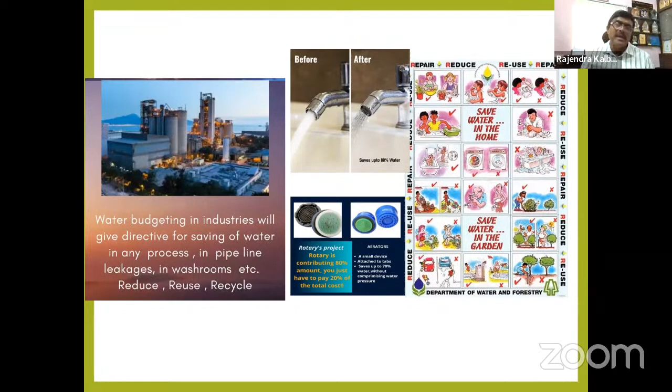There are industries, and in our own New Mangalore Port Trust, which is very famous, they have got a very efficient water treatment plant. I'm told that they are recycling the water 100%, where the BOD is so low that it can be used for drinking purpose also. That means your sewage treatment is converted into drinking water. What a big industry.

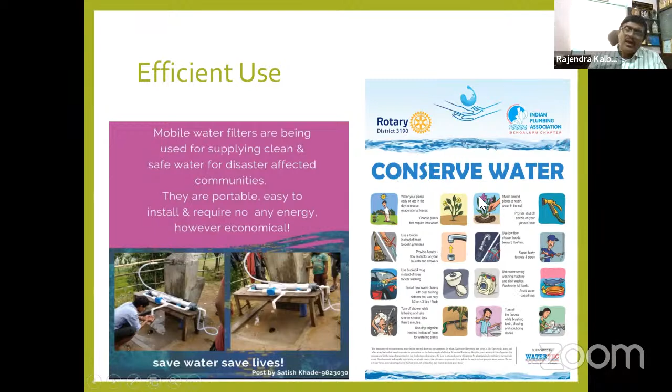There are agencies like Rotary Alliance really working on water efficient methods, water saving techniques. They'll all give you a hand, they'll all help you.

Now this is interesting. I've been talking about India for a long time. Now let's talk about a country. We talk a lot about Israel, which has got 60% desert and only one river. And there is a country on the other side which is a zero water country, called Cape Town. Zero water. You Google it, zero water city, you will get Cape Town's name on top.

So when we have a zero water city, here is a country which says we are very rich in water. People say that if there's a third world war, it will be because of water. Israel says we can increase friendship because of water. What a wonderful concept - it is a very water-rich country as on today. How is that possible? How can a country be water-rich? If that country can be water-rich, can't India be a water-rich country?

Earlier, India was one of the water-rich countries in the world. That is why we were called Sujalam, Sufalam, Malayaja Shitalam, Sasya Shamala. What happened now? Over the years, we have neglected water. We have totally forgotten about water. We have overused and abused water. Now India is one of the water crisis countries, one of the countries facing water crisis.

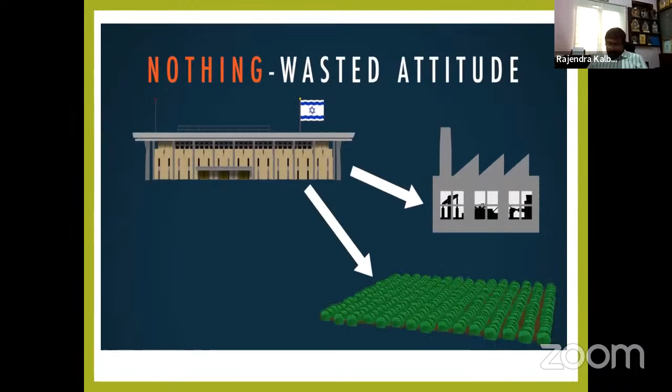So how does a small country with little annual rainfall, with only one freshwater lake, and with no major rivers do this? It begins with a nothing-wasted attitude that extends from the government to private industry to farming to consumers. Israel charges its citizens the market price for water, no subsidies. You can have as much water as you want, but you have to pay for it. And when you pay for something, you tend to be more careful with how you use it.

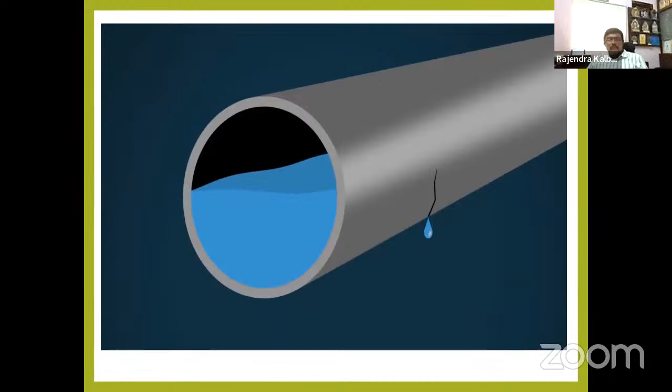This also extends to the nation's infrastructure. In virtually every country, massive amounts of water are wasted every year in leaky pipes. Israel has developed technology that tells it when and where a pipe is leaking so that it can be fixed immediately. This not only saves water, but it saves homeowners and industry money on their water bills.

The biggest user of water in Israel and everywhere is agriculture. To get maximum use of its water, Israel developed the revolutionary farming technique known as drip irrigation, the process of applying micro amounts of water to individual plants at their roots. This is much more water efficient than the traditional method, still widely used around the world, of flood irrigation, flooding fields with water. Israeli scientists have also developed drought-resistant crops that need less water to grow.

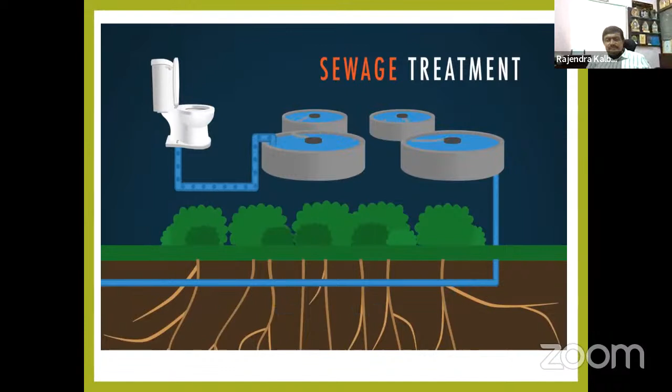Sewage is usually thought of as a nuisance, but in Israel it is now a highly valuable resource. Israel takes nearly all of its sewage, treats it to an ultra-pure level, and then reuses it in agriculture. No other country utilizes sewage as comprehensively as Israel does. Israel has also pioneered the use of desalination, turning seawater into drinking water. Once it was thought to be prohibitively expensive. No longer. Israel built 5 giant desalination plants along its Mediterranean coast that together provide the equivalent of 80% of the water piped into Israeli homes.

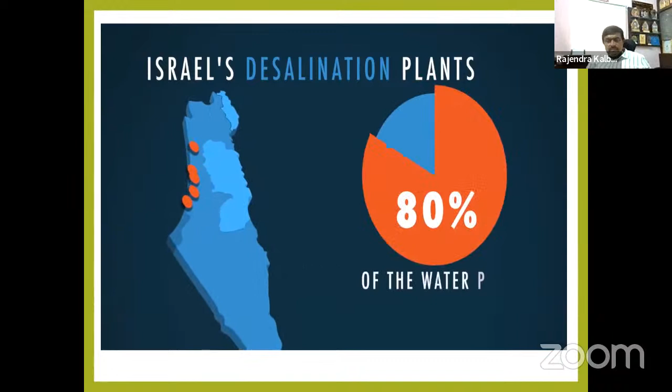Putting all of these practices and techniques together, Israel has grown into a water superpower as well as a global center of water innovation. As the world grows drier and thirstier, those who want solutions will look to a little country in the middle of a desert for answers. Israel is ready with them.